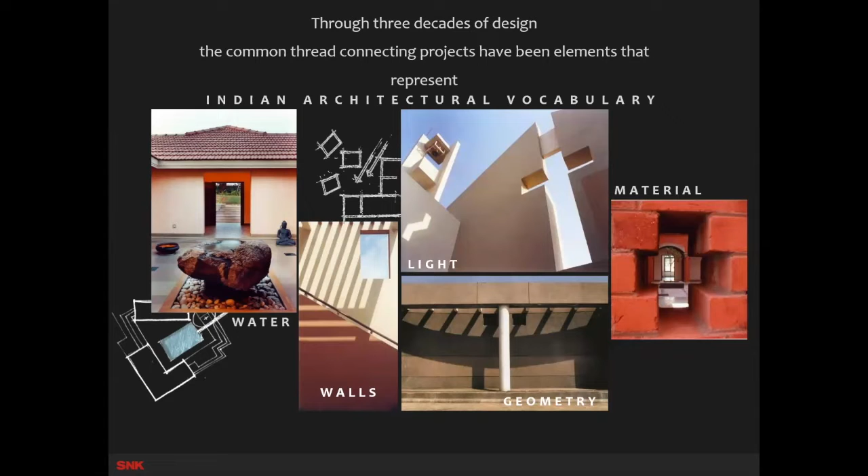So our vocabulary has been, of course, the Indian ethos of water, walls, light, geometry, materials. And that's what's influenced our contemporary work. I'm working all over the country, from the Himalayas to deep down south, from east to west through the tribal areas of Jharkhand and Madhya Pradesh.

And that's what's been so exciting. And a sense of contribution, because we believe India has so much of economic differences that as an architect, we have a responsibility to ensure some sort of equitable and just way of doing things to ensure a fair and equal future for all Indians in different parts.

Okay, now we come to some collaborations. The reason I've shown this is we of course do most of our work on our own, but I do believe that we can collaborate with people worldwide and that we learn. I've put this slide in particularly because I believe the Louis Kahn project of the IIM, I like to think that I could hear his voice and that there's some sort of collaboration that we're doing because of course so many years have passed and so many changes also have to be there. We have to build for the future as well and make sure we preserve what's gone before. So I always think of it as a collaboration, which gives me great satisfaction.

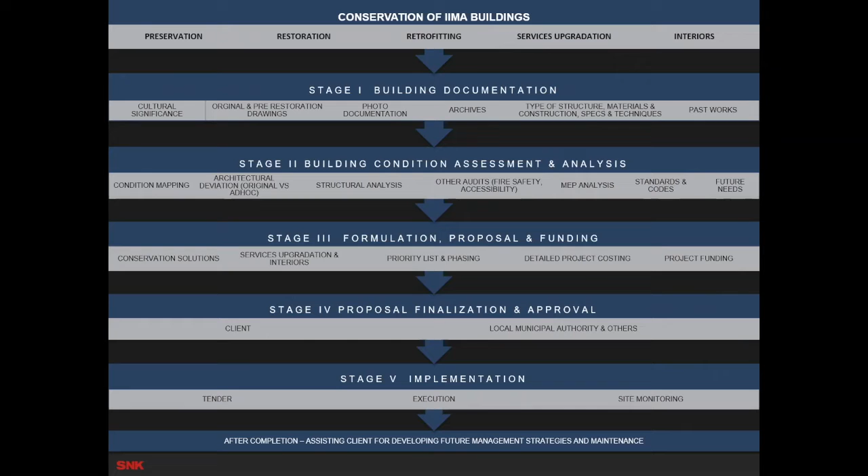We always work on a plan like this, where we have the conservation, and we have different stages of work: from the building documentation with all its subheadings, then the building condition assessment and analysis, then the formulation, proposal, funding, and then the finalization of the proposal and the approval from the client and the implementation. So all this becomes a very important part of a restoration project as against a new project.

So the condition we studied had a lot of issues. I'm not going to go into every single issue in great detail, but there are many types of arches which Khan included in his work. He had flat arches, semicircular arches, all types of arches, and a particular type of working at that time. The brick had a lot of efflorescence. It was not the highest quality brick, and there must have been a lot of salt in the clay that was used at that time.

Now, these were some important sketches that Khan had done. And when he began to work, he was very worried about how the brickwork would be done and whether people would be able to translate his thoughts and ideas.

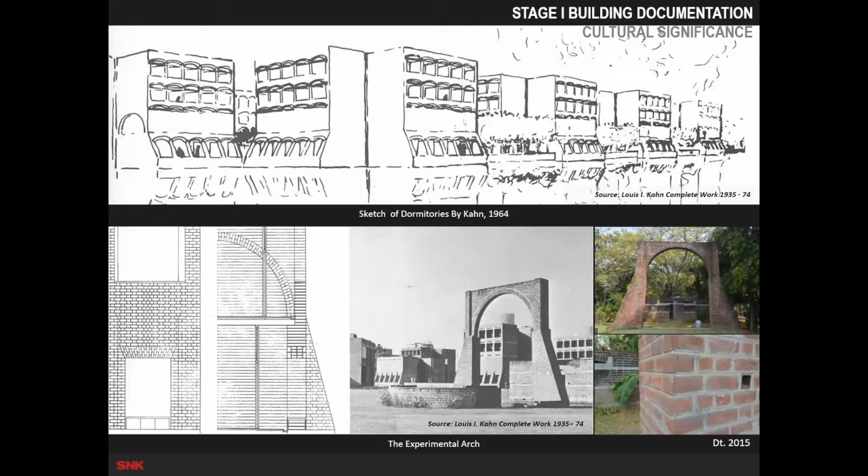So he actually insisted on what he called the experimental arch, which is very sacred because he came to India, worked closely with the people here, and this still stands on the campus, the experimental arch. And this led on to many, many thoughts and ideas on how the construction would then continue to take place.

So I went to UPenn. I did a lot of research there and found some wonderful photographs and wonderful drawings that Khan had done. It was so beautifully preserved, each and every drawing, wearing gloves and in boxes. And I think we have so much to learn from the way that archival material is protected and saved.

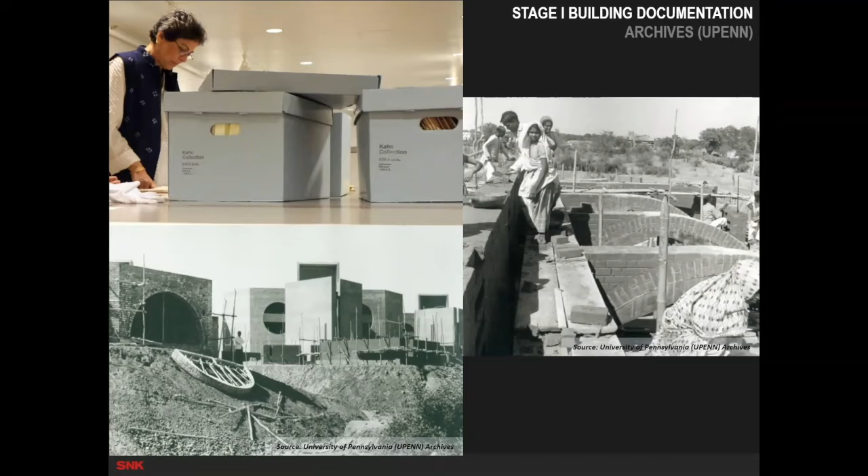So you can see women working. This was the early 60s on the campus. And these were some images which showed during the construction, which are quite rare, which we were able to get.

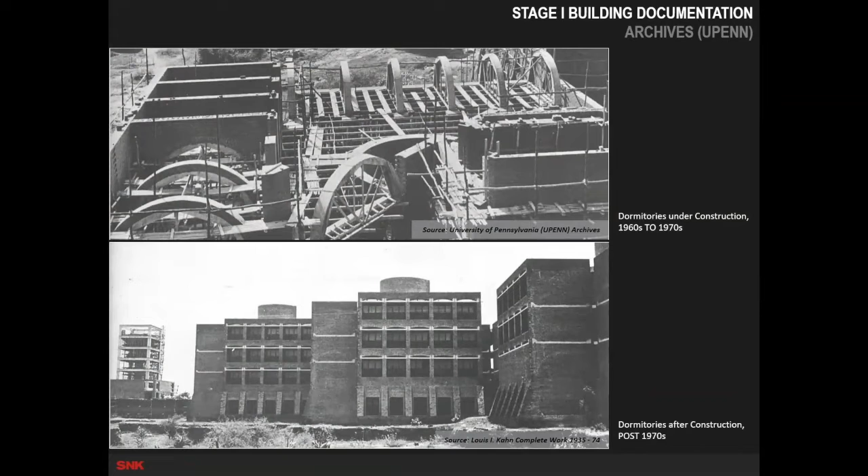So the dormitories were built first from the 60s to the 70s, and then 3 dormitories were built later. And then they began to build all the central buildings. So you can see a photograph here which actually shows the dormitories at the back, and then you can see the foundations for the faculty building on the left, the school classroom building on the right, and the library, which came afterwards, and the scrubland in the middle. So it was a very different world, and this was the world where Khan came and built and did all his work at that time.

Sharad Shah was the structural engineer. We managed to find a few drawings thanks to the IIM, which had kept some of the drawings, and that helped our structural engineers as well. And while we were doing our research, I went into one of the offices and found this wall planner lying there, and found that it was actually kept by the people in 1974.

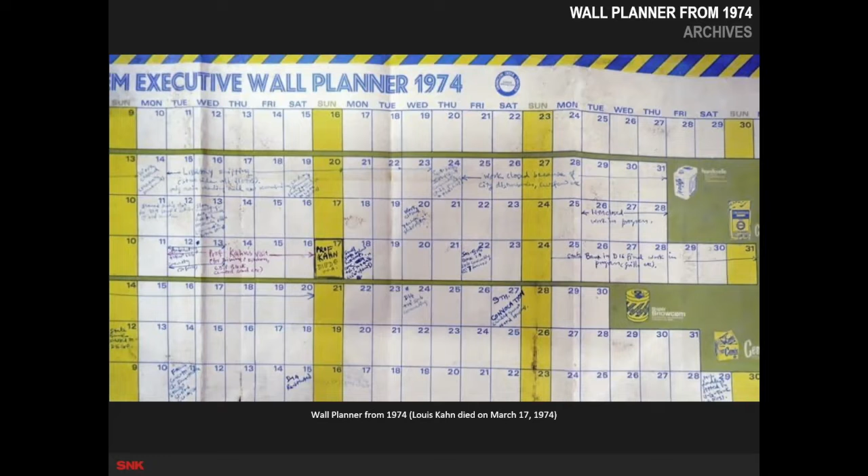And if you look carefully, you will see on the 17th that Khan died. So what actually happened was Louis Kahn had come to Ahmedabad for work and then went back to New York, and actually died on his way back from India, in New York. And I thought it was interesting how they just wrote it on a wall planner, that he had gone.

So as far as we were concerned, we won the competition in 2014. And then we began with actually a lot of analysis of the entire campus and preparation of the master plan. So we began the analysis of the dormitories, library block, and the other buildings. And only one dormitory building was taken up, which was D15. We chose it because it was in the worst condition.

And then the IIMA actually has to build student housing, which they're doing currently in the new campus, because they cannot give up these dormitories for serious restoration work until they are empty. And that can only happen when the new buildings come up. So there's a lot of toing and froing that will happen. So subsequently, we then took up the library block, and now we are doing the faculty block.

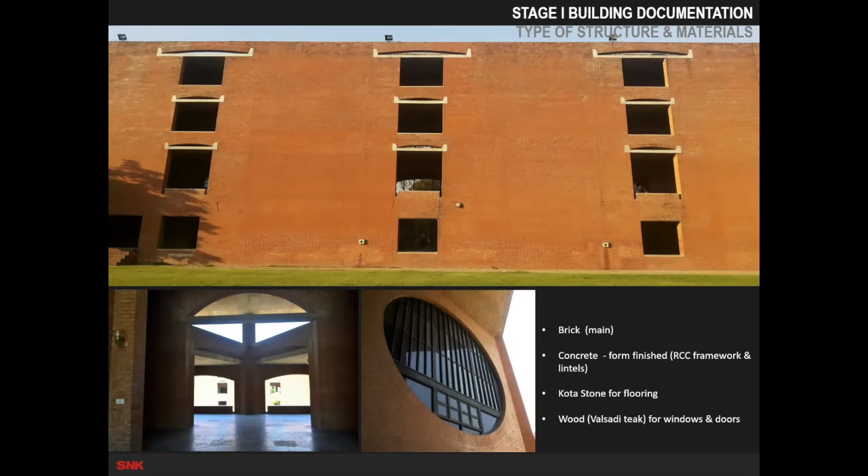So you can see here documentation. The 4 major things, the materials were the brick, concrete, the Kota stone, and of course the wood, the Valsadi wood. These were the 4 elements that were very, very crucial.

So we actually had to go into the foundation and the substructure. We had to study it. We had to study the load bearing, reinforced brickwork, because the reinforcement of the brickwork caused a lot of the spalling, which has caused, in fact, a lot of the issues as well. And then the RCC framework and the different types of the brick arched openings, every shape and size possible.

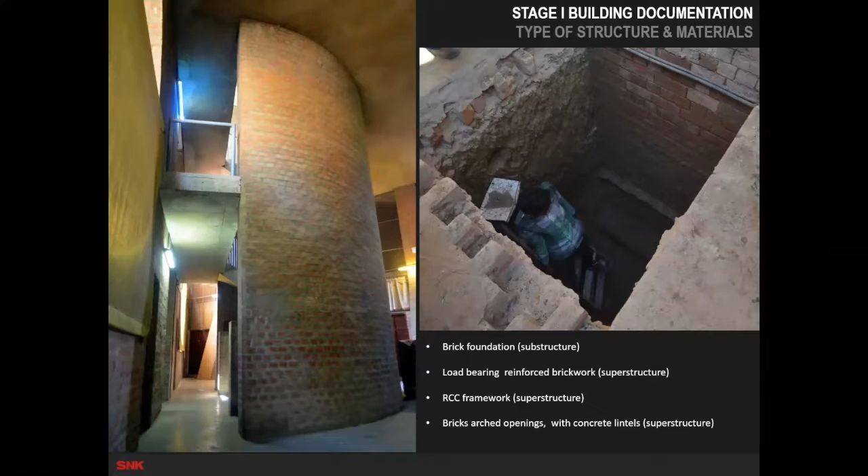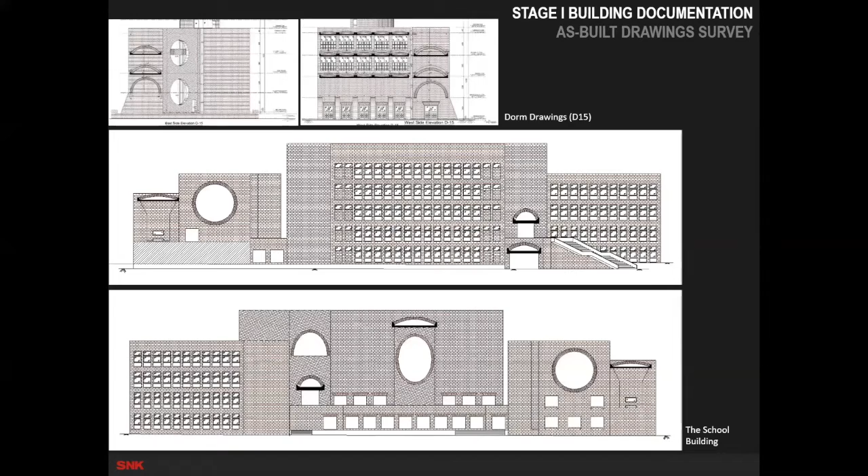So we began with the building condition analysis. There were no drawings at all. We actually had to start from scratch and prepare all the drawings that you're seeing on your screen now. There was nothing available to us. We searched very hard, we couldn't find anything, and there was nothing that could be shared either.

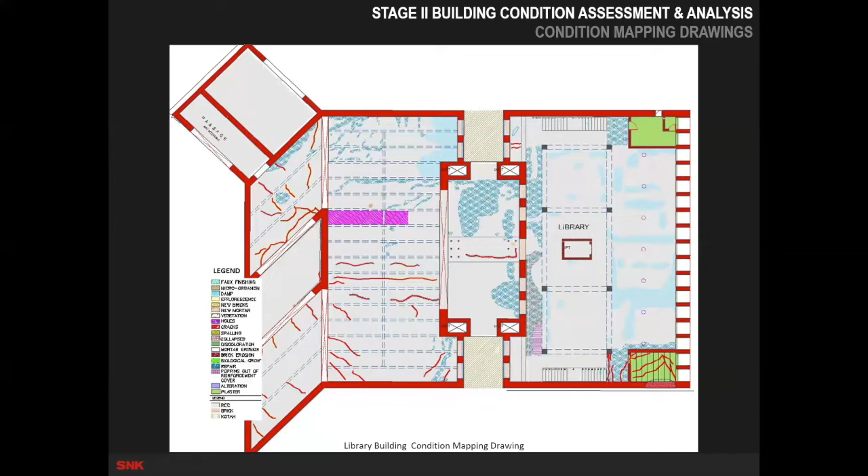And we went on, we prepared this, and then we did, of course, the condition mapping, which is the most crucial part of restoration of any building. And you can see there's so many colors here, and there's a legend. And each one of these issues on the legend has to be treated very seriously for us to understand what needs to be done for the building.

Then we come up finally, after doing all this, with the conservation plan. So to do the conservation plan, we have to study the condition assessment as well. For instance, the way the bricks were filled. Not only was the pointing not a recessed pointing, which would have been ideal because water runs off, but you can see to the right, the front, how it was the face-filled pointing. And since it was cement pointing, not lime, it was very difficult for us to remove. So we have had to accept the pointing that was originally there.

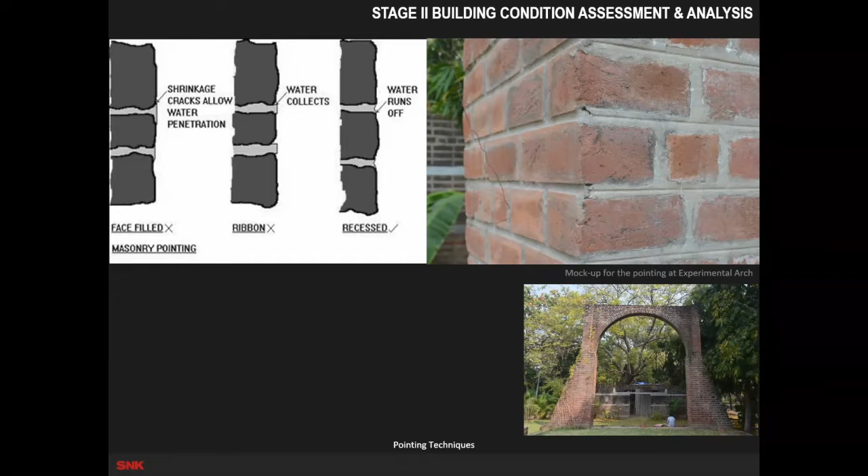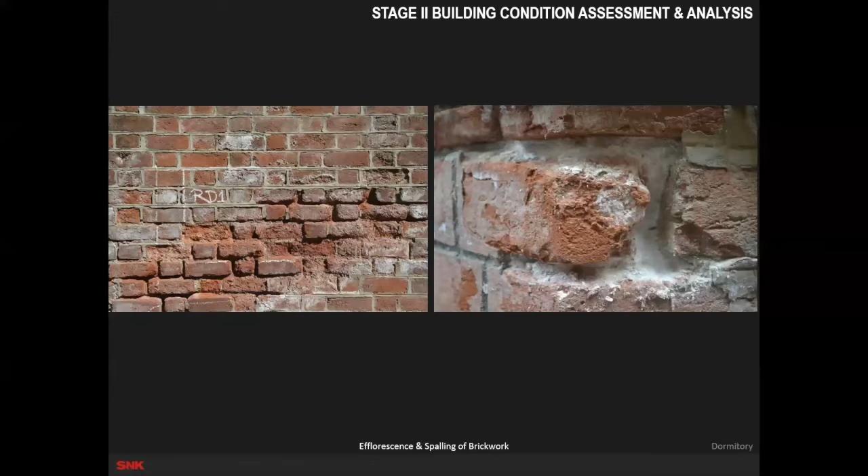So this is just one example. There were hundreds of examples like this where we had to study and understand how do we have continuity and change. The picture below is, of course, the experimental arch. And then you can see the efflorescence and the spalling. The efflorescence, of course, because of the salts that were in the clay that was used for the brick and the mortar. And the spalling over here was tremendous, also caused by the MS reinforcement in the brickwork.

Now, apart from that, there were also masonry cracks. You can see to the left, vertical masonry cracks. Now, how do we issue and how do we handle these sort of major issues?

The issue always with restoration is also that sometimes people will say, if you have to spend this much and if you have to restore this much, why don't you just break it down and build it new? It will be cheaper perhaps. And this is the challenge that all of us architects have to face, whether we're conservation architects or whether we're just regular architects, it doesn't matter.

We have to preserve what's gone before. By breaking things down and just building anew, the value is gone. So a decision has to be taken: is it worth saving, is it worth keeping, and why? And then one has to go about it seriously, work on it, and make sure that it becomes relevant for use today.

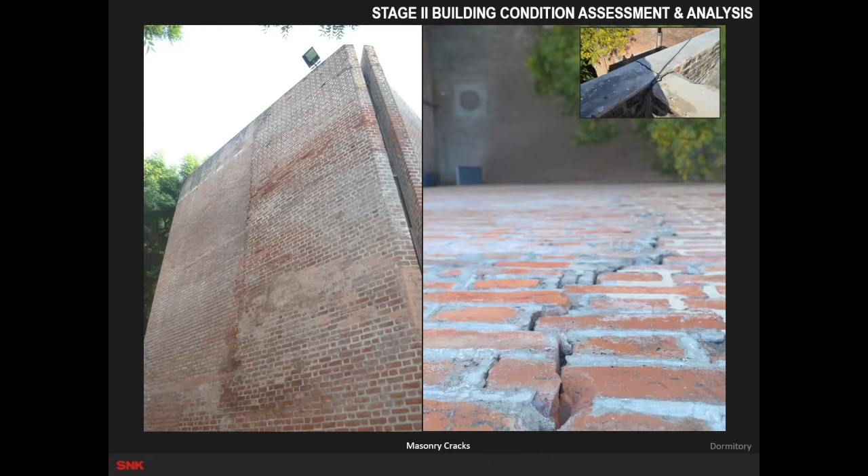We cannot make everything reverential. The Rajabai Tower could be reverential. But when you have a building that's part of a campus being used by hundreds of students, how do you create that balance? That is the challenge that is always there for people like us.

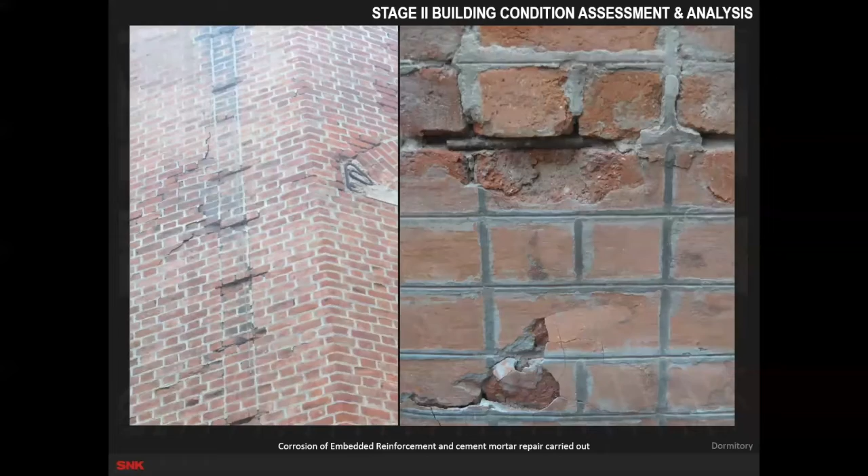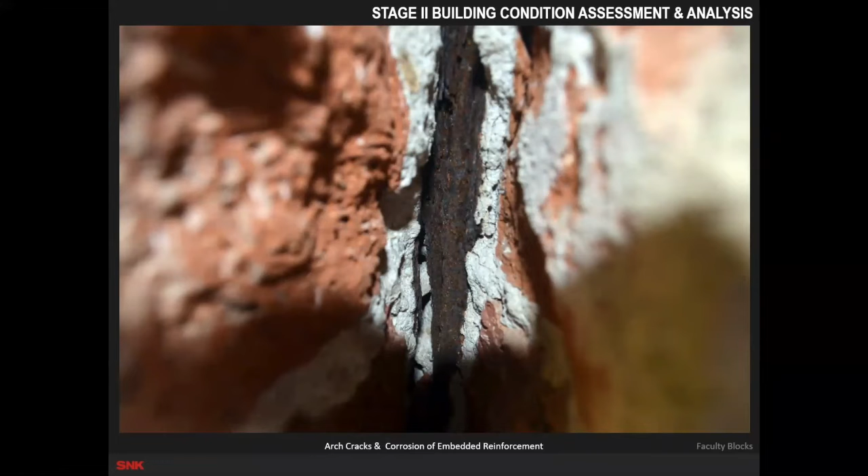So you can see over here, and if you look carefully, the picture to the right, you can actually see the MS bar popping out. That was the situation in many areas. You can see the base of these segmental arches and their condition. And then, of course, the cracks and the embedded reinforcement. If you look carefully, you can see the embedded reinforcement inside.

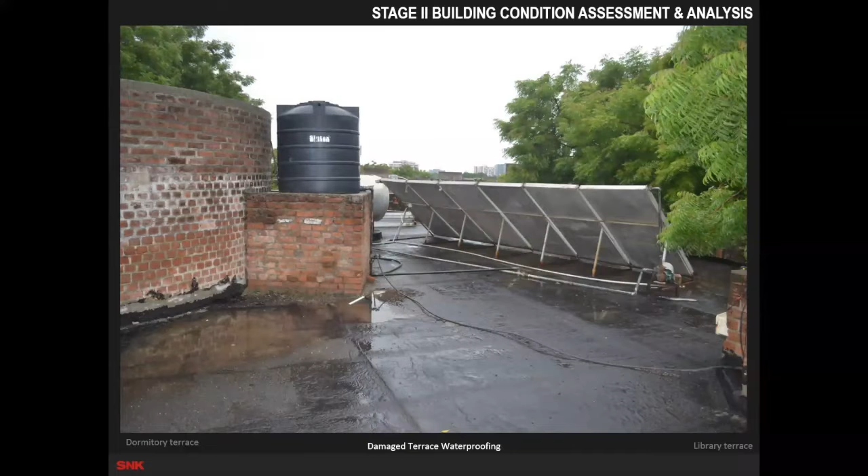Now this is some of the dormitories. Whether it was the quality of the construction, you can see the exposed steel bars in the slabs, their efflorescence. You can see the leakage from the terraces coming down. And then the waterproofing—layers and layers of waterproofing over the years took place. And then naturally, water begins to creep in between the layers also.

So to be very honest, these are not easy buildings for the IIMA to maintain. They were very complex, difficult buildings. They had certain weaknesses in the construction itself and the materials used at that time. But they were worth preserving. That's what was important—they had to be preserved.

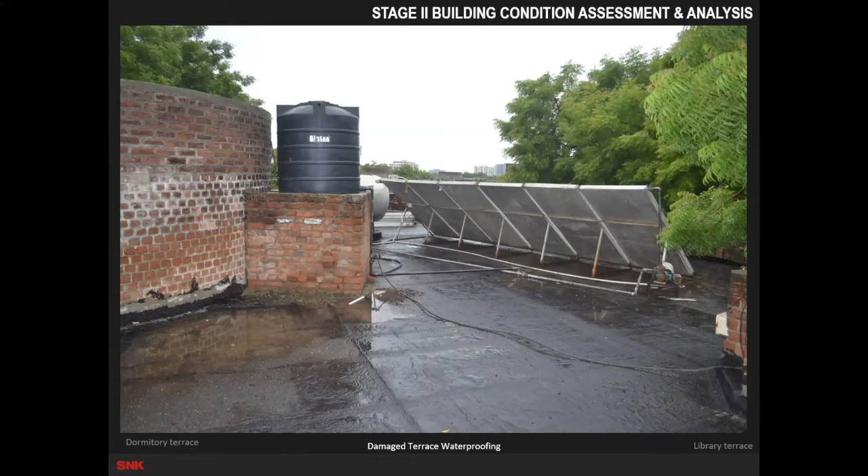They had to be restored. They had to be retrofitted and made relevant today. That was the challenge. There was no question of anything else. How do we address that?

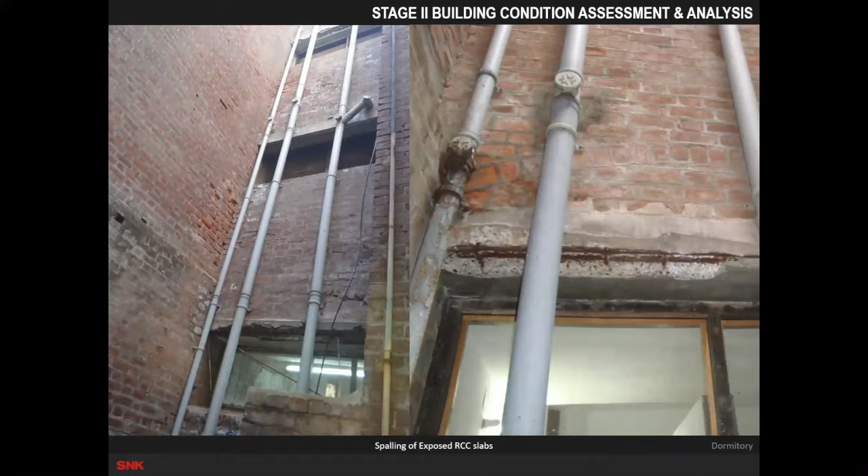So of course, this happens in many buildings. The shafts were designed way too small. Today we have shafts, we have different types of toilets, air conditioning in some areas, the electrical systems have changed, we have information technology. So naturally all that had to go.

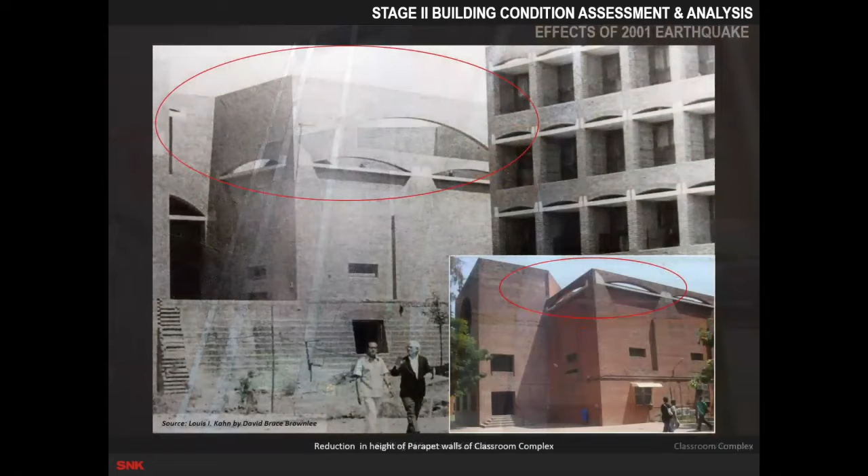And the other problem was after the earthquake—the Gujarat earthquake—you can see that they actually had to reduce the height of the parapet walls, and also in the dormitories, just to make sure that the buildings were stable.

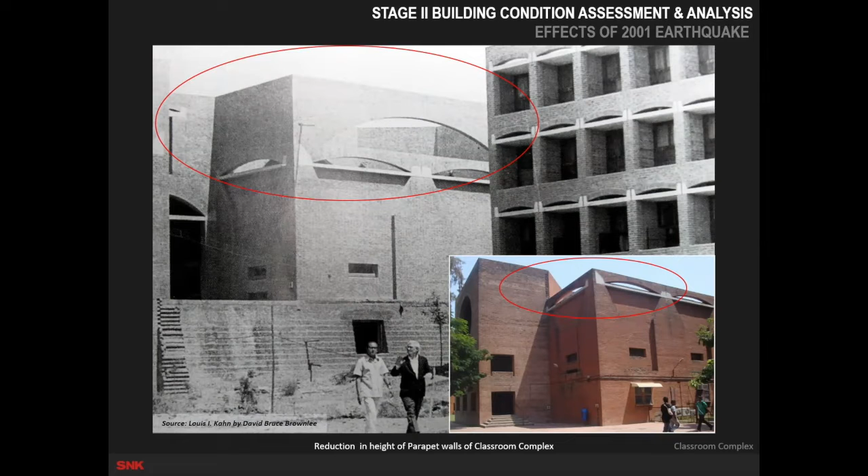So as conservation architects, as restorers, as architects, what do we do? Do we build back some of these things? How do we make it structurally stable? How do we try and bring it up to codes? How do we make it barrier free? So many different issues come up all the time.

So for instance, the staircase block of the dormitories—you can see to the right how high they were—and they were brought down after the earthquake. We again have tried to increase them, so that they have an architectural quality. But of course, we could not take them to be as high as they were originally.

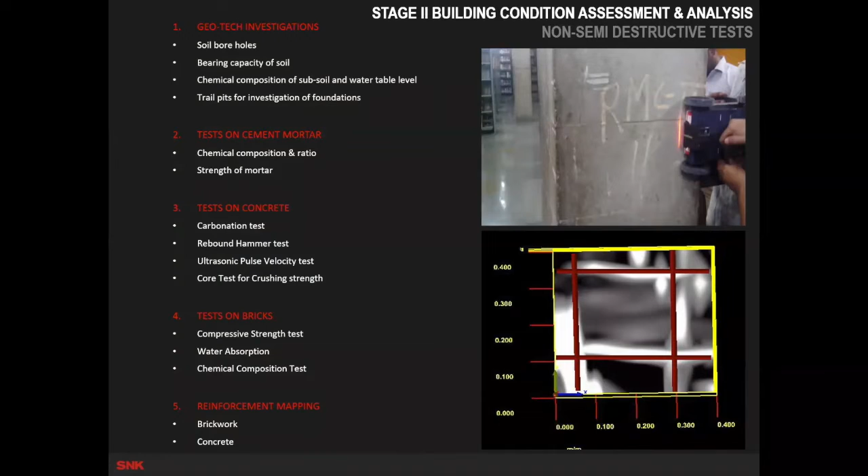So then we come to the NDT testings, the geotech investigations on the cement mortar, on the concrete, on the bricks. We had to map the reinforcement. The picture to the right shows how we had to map the reinforcement within the brick. So a lot of non-destructive testing was done, and this is some images of how it was done.

Of course, I can't go into detail—we run out of time.

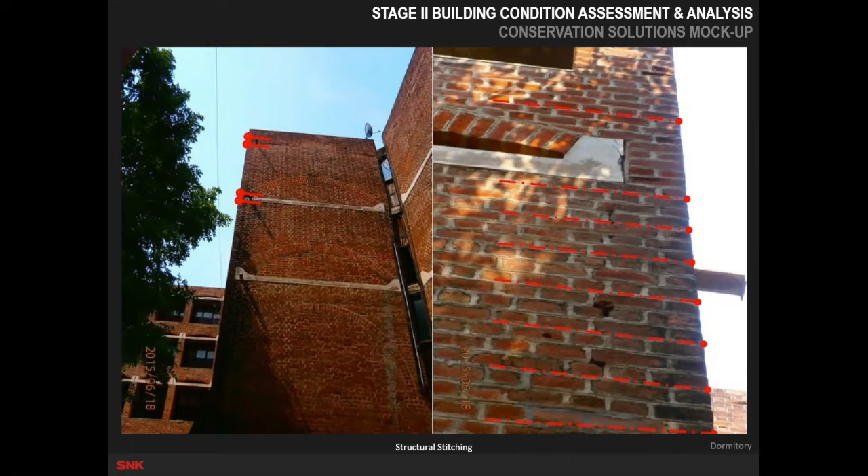And then we had to do structural stitching because there were cracks in certain areas. So what we did—we had to structurally stitch certain areas, remove some bricks where they were really not good, and replace them, and sort of staple it in a particular way. So it was quite complicated. Wherever we could repair the cracks without having to do anything major, that's what we did.

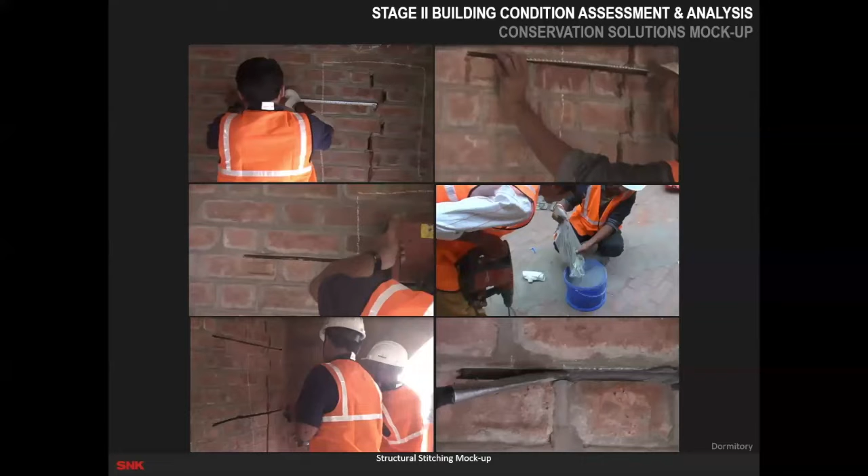And you can see over here how the structural stitching mock-up was done. It's a very careful process, the insertion of the stainless steel. Now we've put in stainless steel, and how we have to insert it, how carefully it has to be done, in particular areas only.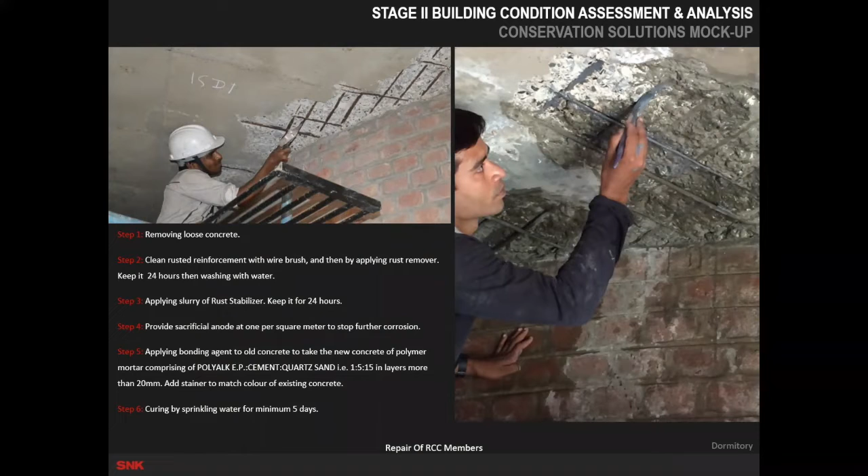And then the repair—of course the RCC, this is obvious, I don't have to go into that—how you have to remove the loose concrete and then the rust stabilizers and various other things that needed to be done. And then, of course, cleaning of the surface. Finally, we decided we were not going to use any chemicals or anything, and we've done basic surface cleaning.

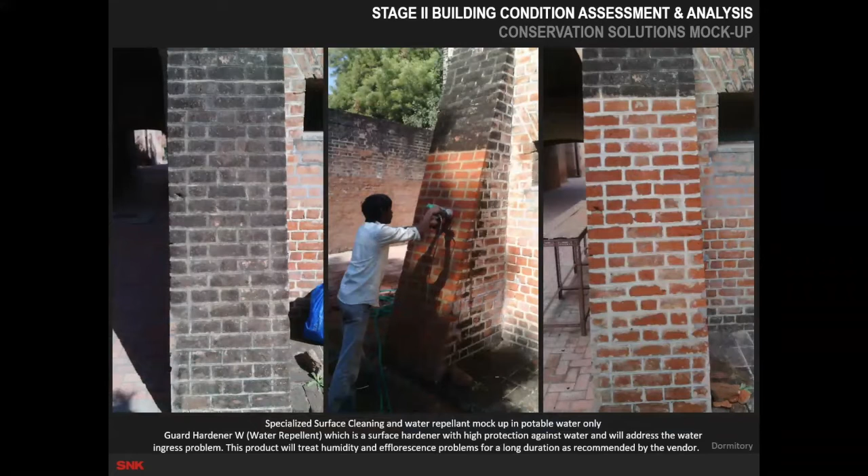And we did water repellent. We did the mock-up, and you can see we were quite satisfied that this is good enough for what we intended the restored buildings to look like.

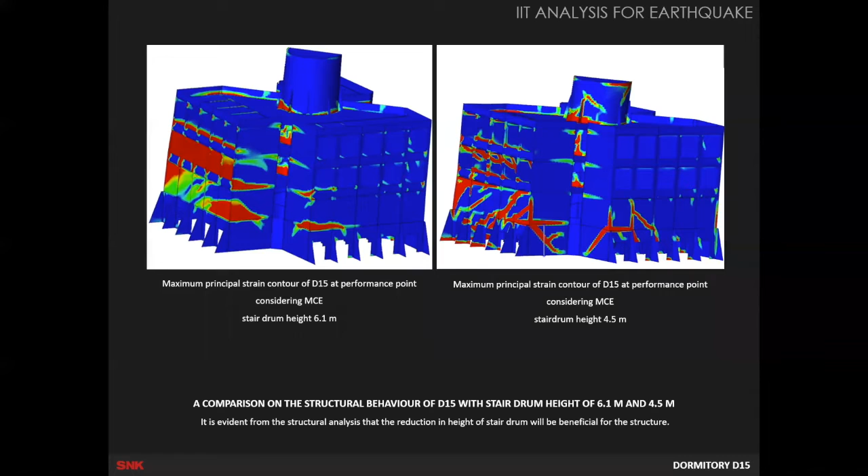Apart from our own structural consultant, Mrs. Gadiali, we also went to the Indian Institute of Technology in Madras, where Dr. Arun Menon helped us with the seismic considerations and analysis for the earthquake. We found that the structural behavior of the dorms, because of this increased drum height, had caused certain issues. You can see with red, and that had to be addressed.

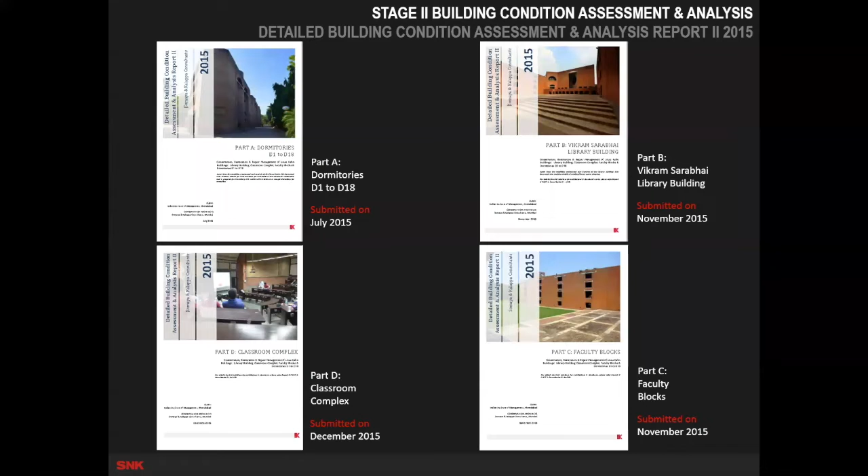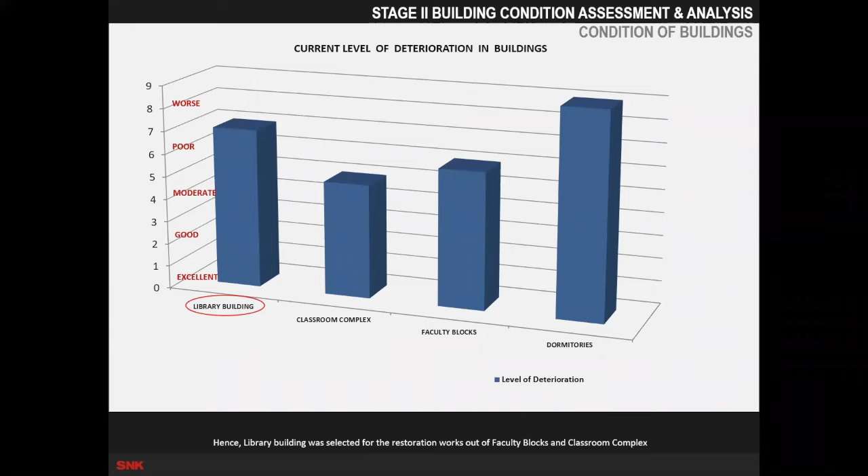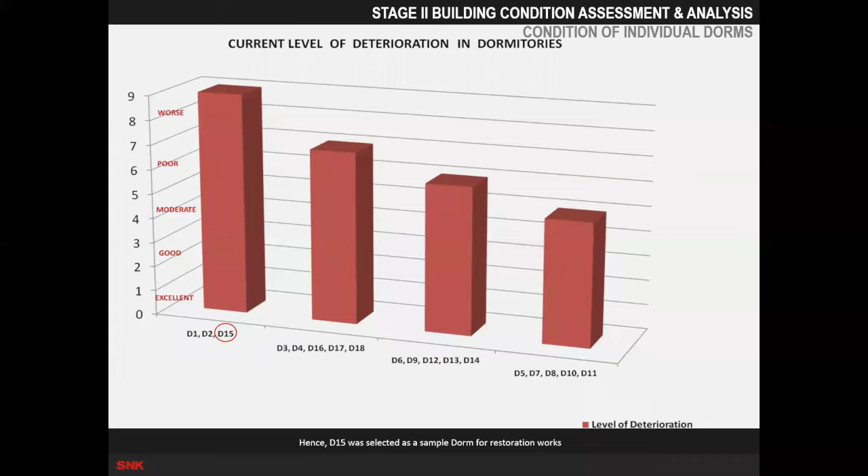Then, of course, we prepared a very detailed building condition assessment of all the aspects of the entire competition area and the various buildings that form it. We found that the library building needed certain work, and certain dormitories, like D15, also needed work. So we decided to take D15 up as a trial dormitory, since it covered almost all the different aspects of deterioration that the other dorms had, so the IIM could take up the others at the appropriate time.

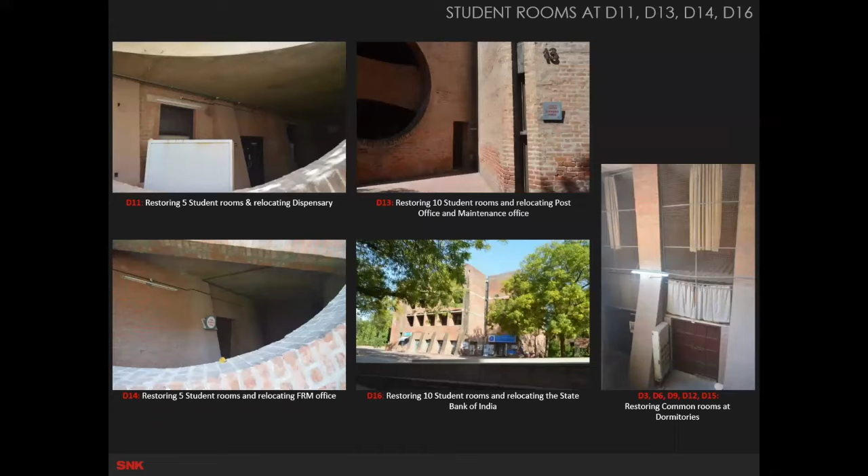So we took up, you can see D11, there was a dispensary; D16 had a State Bank of India, so offices, post offices, maintenance offices. We did an analysis of all the dorms and how we had to address each one of them.

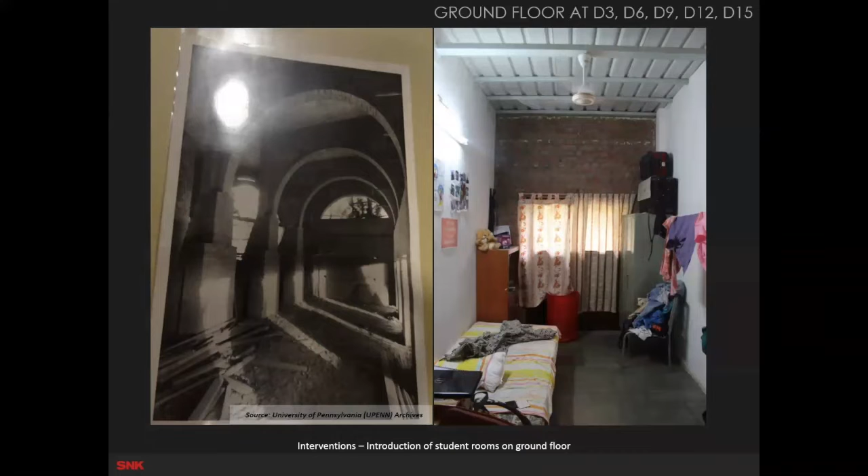This is how, to the left, Kahn had probably envisaged that this would be the student rooms, and how with a false ceiling some of these areas had been converted into rooms for the students. So essentially, on two sides of the triangle the rooms are there, and then you have the big triangle in the center with the staircase and the attached block, which has the pantries, toilets, and any other services that were required.

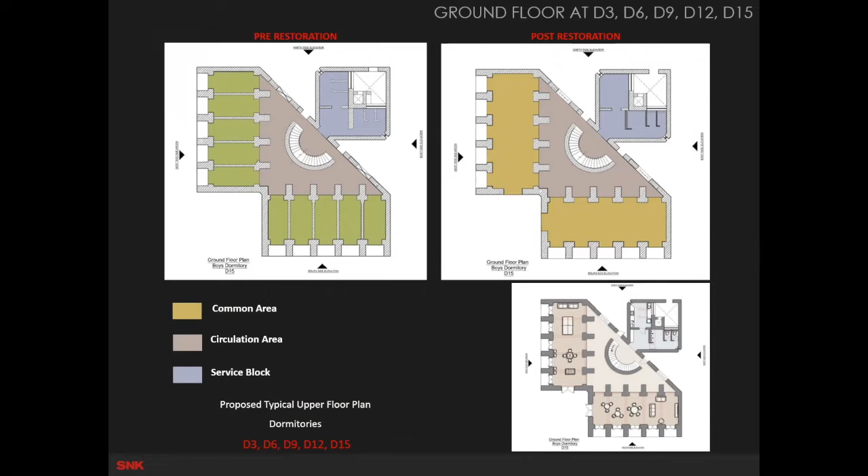And post-restoration for D15, we kept it very, very clear what we wanted to do. We did not disturb the planning at all. We just upgraded all the facilities and stabilized it.

So you can see over here the three red rings which were brought down, and the difference in the height of the staircase block, which caused many earthquake-related issues. And then we began the retrofitting proposal of how we could retrofit the building.

And we brought back what Kahn had envisaged to the ground floor. So if you see on the bottom right, the plan, we have opened up what had become rooms back into the lounges and the common rooms for the students.

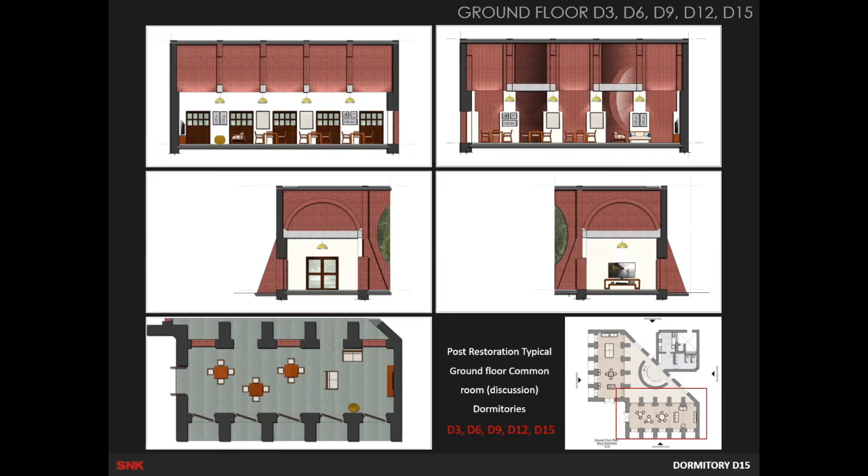But when we did that, we also had to strengthen certain things which had deteriorated over the years. So we had to introduce certain beams, but we did it in a particular way that was strong, yet did not disturb the internal feeling and the double height feeling that Kahn had created in these rooms.

So this is what we had proposed - these are our drawings, and this was a typical student room, where we studied a lot of how Kahn would have liked it. He didn't like too much color, but India is a different place - you know, we can't just have grays.

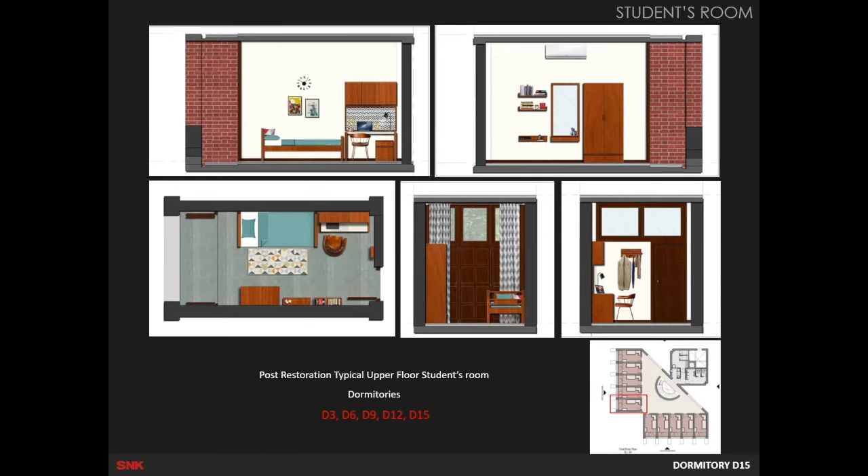So we had to understand how do we create this balance. We studied a lot of his old projects - how he used color, how he used light in his different Kahn buildings all over the world.

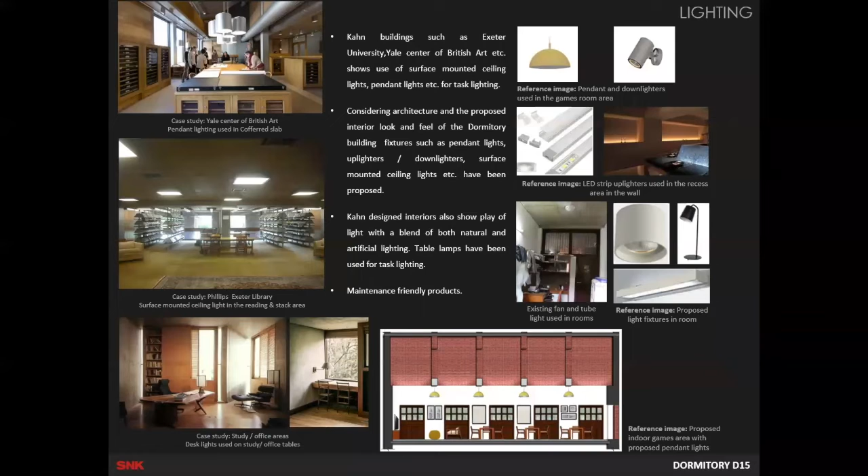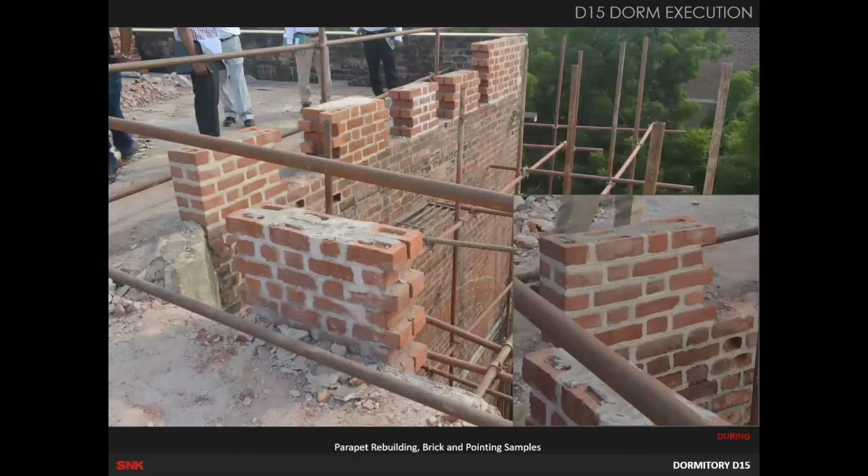This is, of course, the building at that time. Over here, we rebuilt the parapet because there were weaknesses there. We did a lot of sample pointing, and finally went with the one on the right.

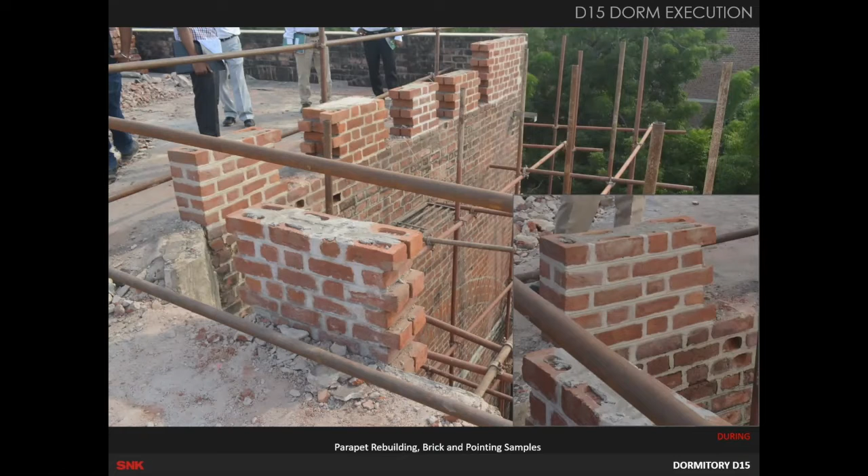We tried 4 or 5 different types of brick because the brick that Kahn used wasn't the typical bright red terracotta color. If you know IIM, it's not the Mangalore type of brick - it's much more pinkish, lighter in color. So we had to go to 4 different quarries and establishments until we managed to get the closest match we could find.

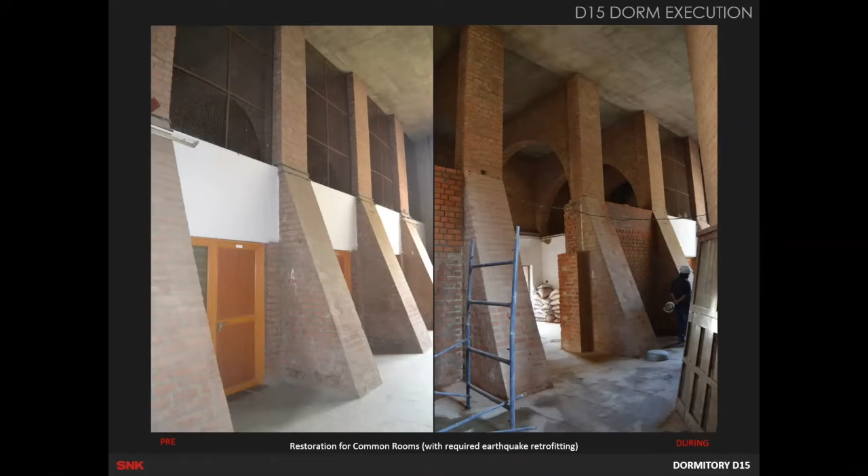Then we began repairing the doors, windows, the stitching, and the RCC work. You can see how we restored the common rooms, got rid of the false ceiling in between, and took it back to its original wonderful height.

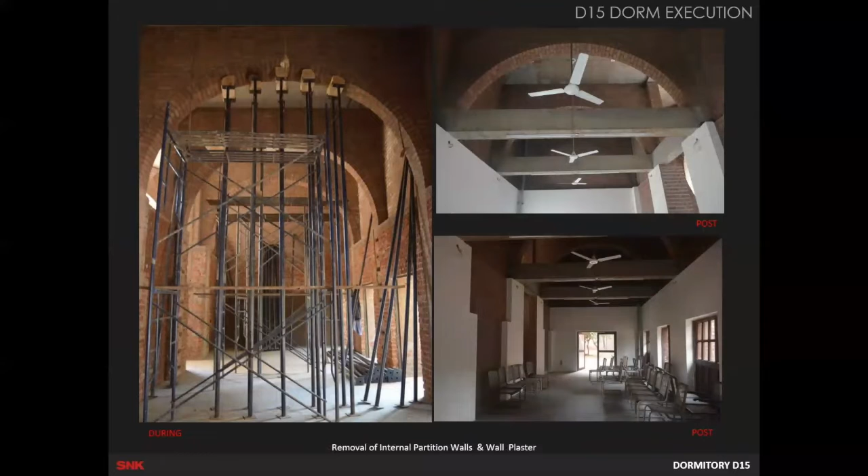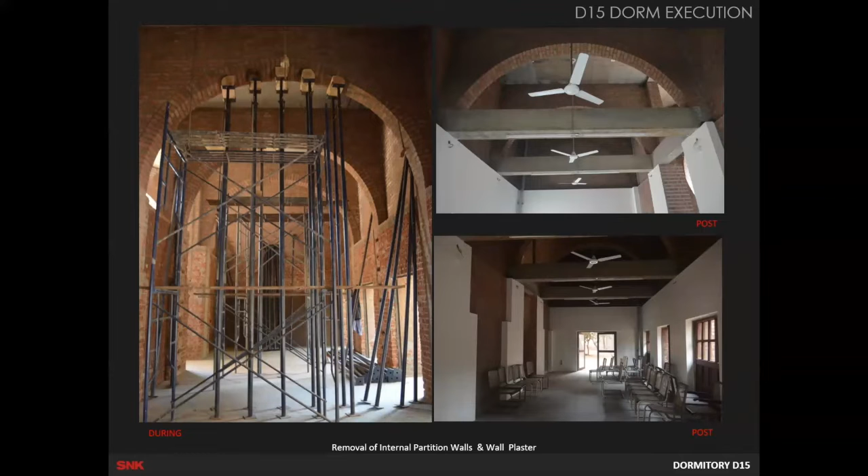You can see walls had been built in between, so what we did was puncture those walls and bring it back to the outside, because those were also original entrances into the building at that level - all these buildings enter at different levels. You can see in the picture to the right how beautiful it becomes once that double height feeling is restored, and what we've done by puncturing through.

We could not remove the white paint completely because it had gotten into the brick, and when we tried, we found the brick wasn't strong enough for the paint removal. So there were some things we had to compromise on and accept in a way.

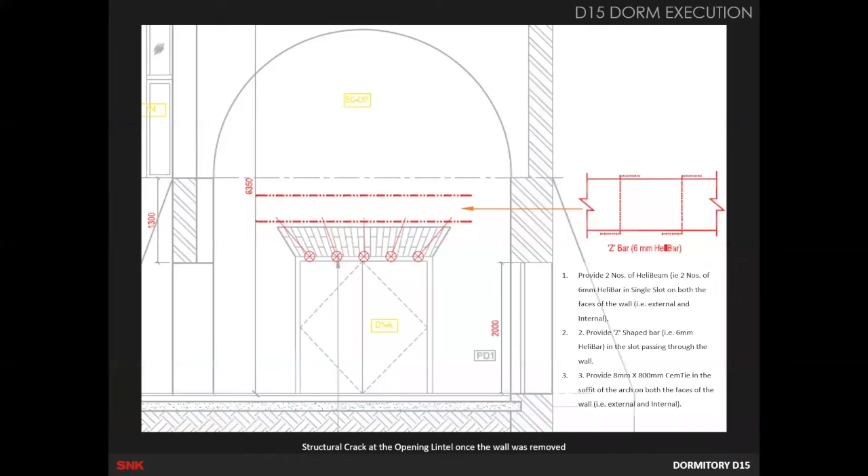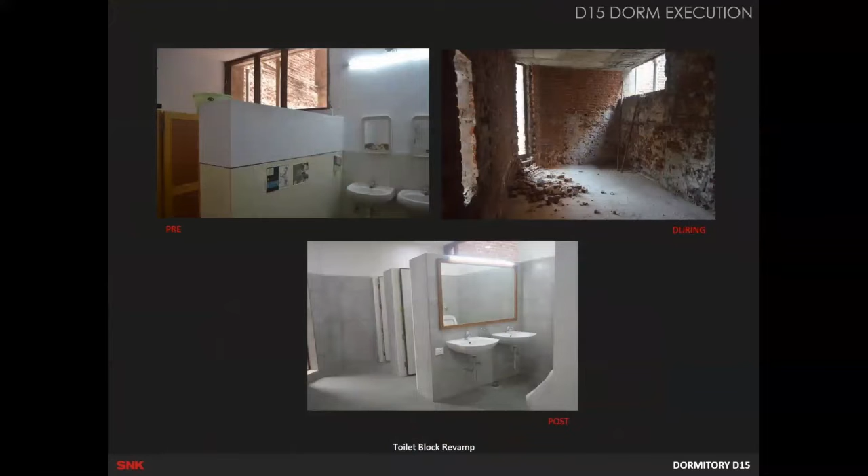Now to come to the library building, which is the main thing - we had to restore the fabric, upgrade the interiors, and have fewer stacks. Here the IIM was very supportive because they actually moved a lot of the books out to another area.

Students use the library for different reasons now. They don't necessarily come just to read or just to read books - sometimes they can even sit in their rooms and study. So why do they come? They come to interact, to collaborate, to discuss. But some come for quietude, for solitude, so we have silent rooms. We did this combination.

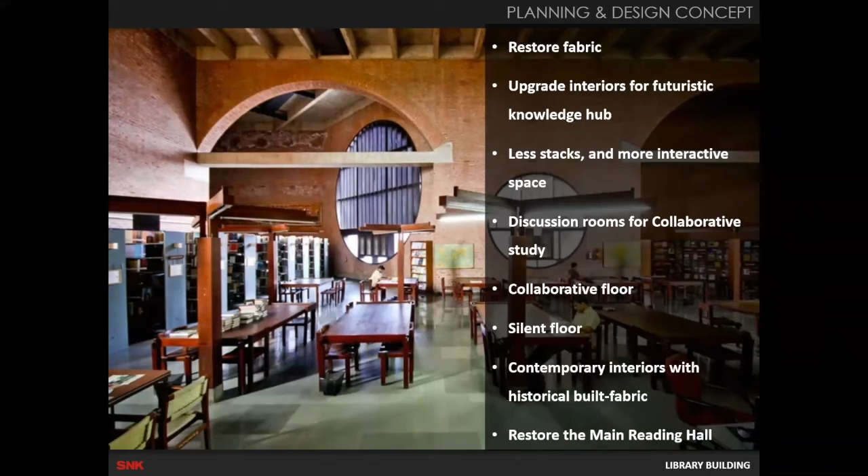And of course, the most famous, beautiful triple-story height is the main reading hall, which we restored completely. So we studied the silent zone, quiet zone, and conversation zone.

We worked very closely with the librarian, Dr. Anil Kumar, and I was very sad to hear last month that he passed away of COVID. We miss him greatly because he was a wonderful support to us, along with the director, Manoj Bhatt, and all the other people. Dr. Anil Kumar was there with his team on site every bit of the way to tell us what his dream and vision was for this library.

Now this is post-restoration - I'm showing pre and post. We got rid of a lot of the stacks. This is the first floor plan, which is the main entrance. We created an interpretation center, moved a lot of the stacks away, and created a cyber laboratory, lounges, and interactive spaces.

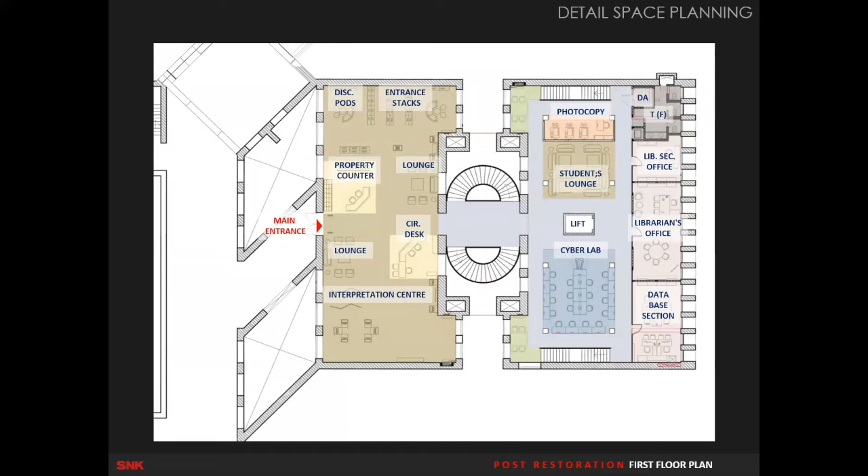The ground floor plan, at the lower level where you can enter only on the south side, used to be a publication department with stacks, offices, and administration. What we did was create coffee breakout spaces on one side, a children's section, and concentrated stacks in only certain areas at this level.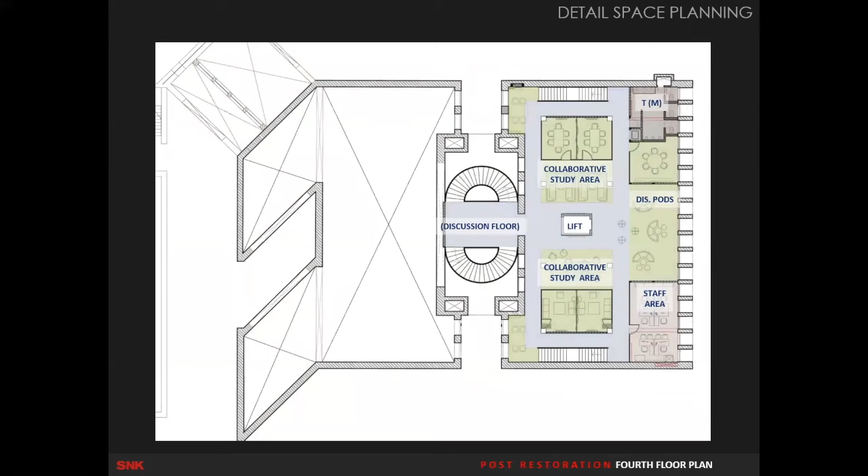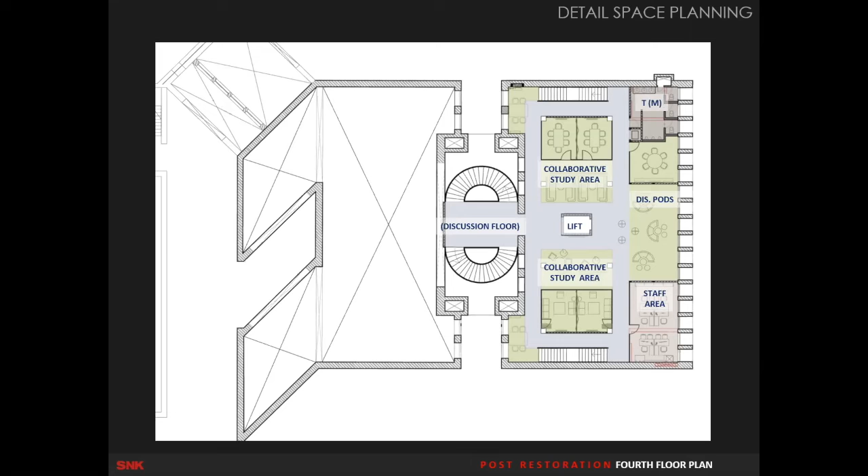But then on the upper floors, which was just stacks again, we began to change things a lot. We had carrels again, periodical sections, stacks, and here we created collaborative areas, study areas where the students would come, chat, open spaces for discussion, keeping all the time the triple level reading hall exactly as it was.

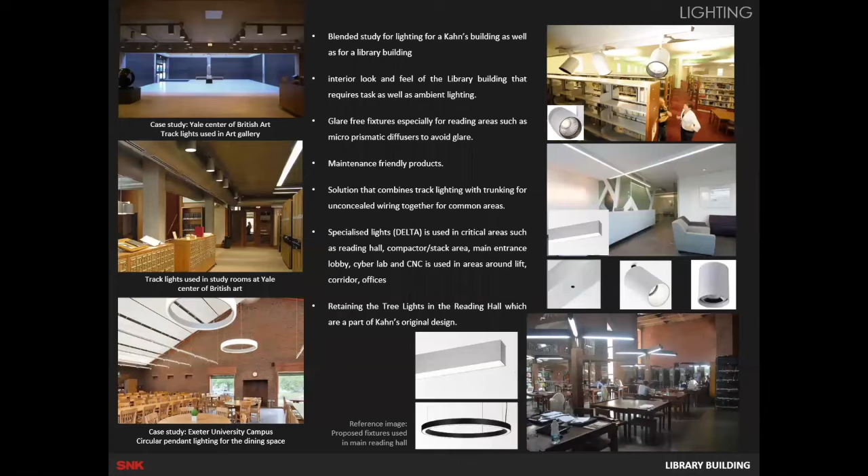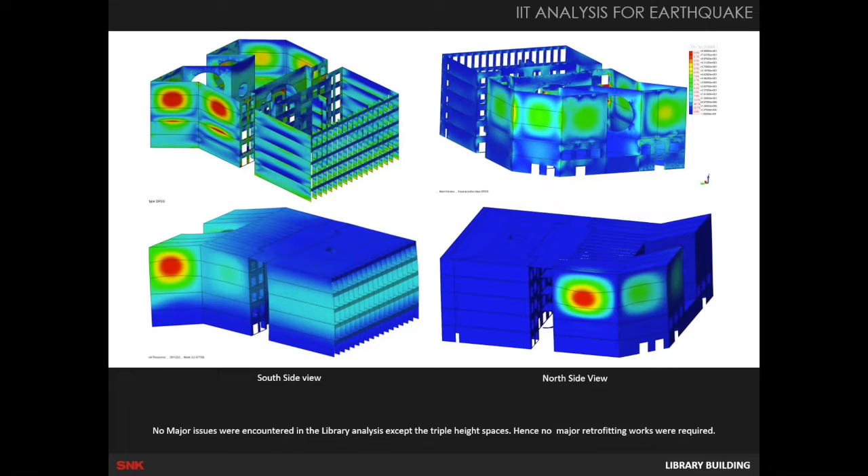How do we bring in color and youthfulness, good lighting into the building. All this becomes very important, air conditioning, lighting. Here we had less problem with Dr. Arun Menon's analysis because of the shape of the library, unlike the shape of the dormitory, the building was of course much more stable. So we had only some areas where you have the red, where we had the issues.

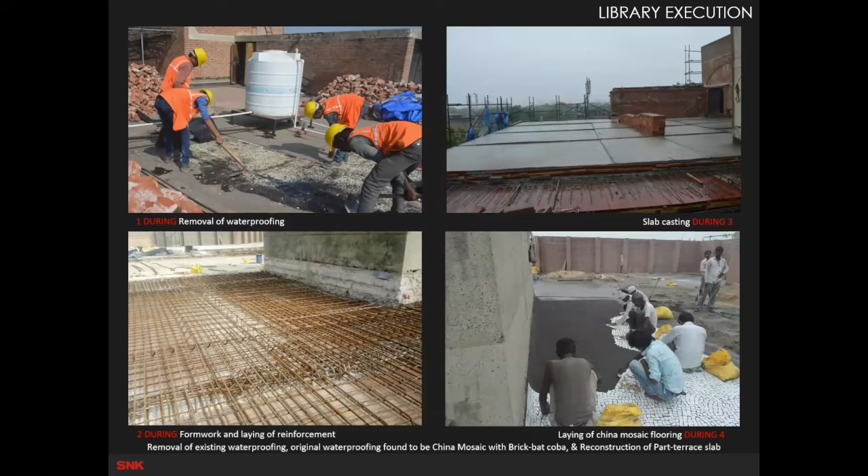Then the implementation began. We had to reconstruct the terrace slab, which had completely deteriorated. We had to create new parapets. And of course, it was a process. You can see removal of waterproofing, casting the new slab, laying the China mosaic, similar things to the new parapets shown earlier. You can see the retrofitting going on.

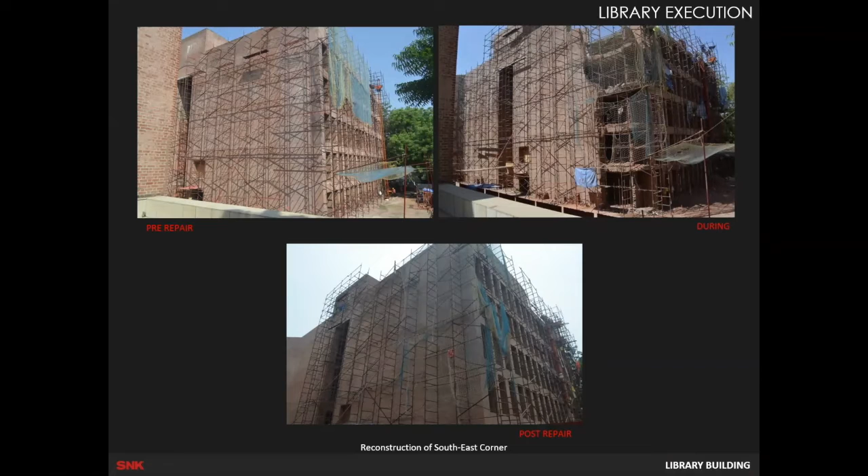Now, this was interesting because the southeast corner of the library had completely deteriorated, and we were not going to be able to do the stitching that we had done earlier for the dormitory because it was in a very bad state. So we actually had to remove the brickwork in the southeast corner and reconstruct it very, very carefully, as well as the 85 flat arches that we had.

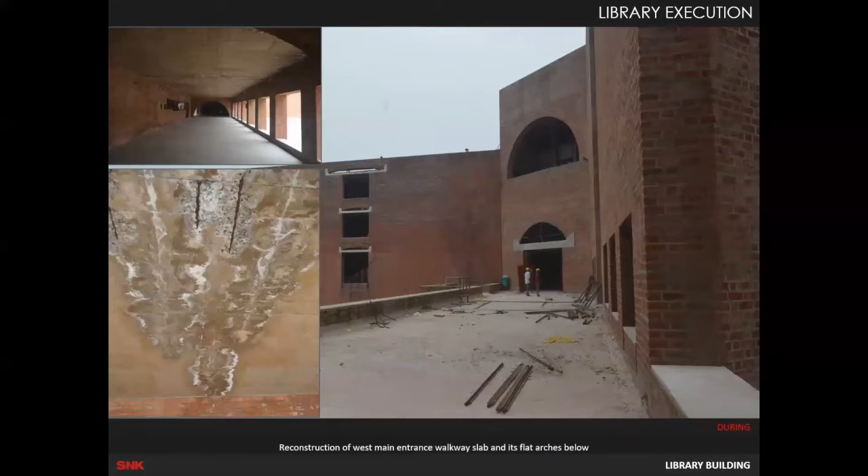Some new brick pointing was done. And of course, the slab below, you can see the condition. So that slab also was completely recast.

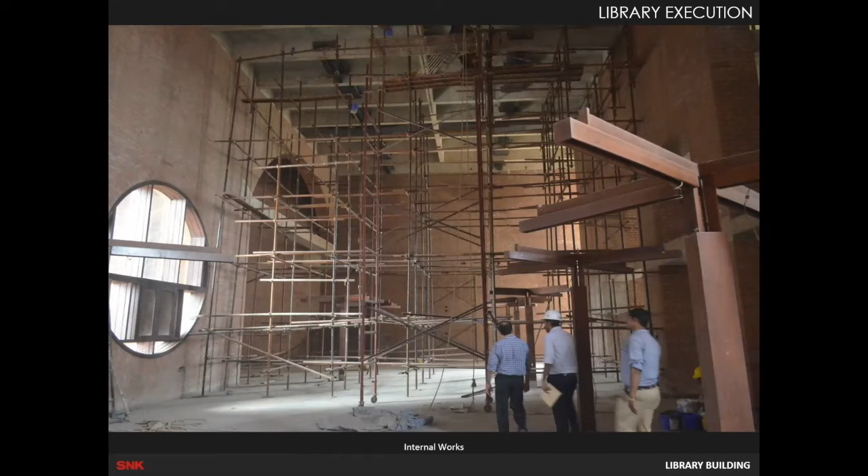And then we come to the magnificent triple height. There were issues. There was air conditioning earlier, but there was a lot of efflorescence, a lot of issues, some of which I've mentioned before. You can see some of the services, the condition of the RCC slab.

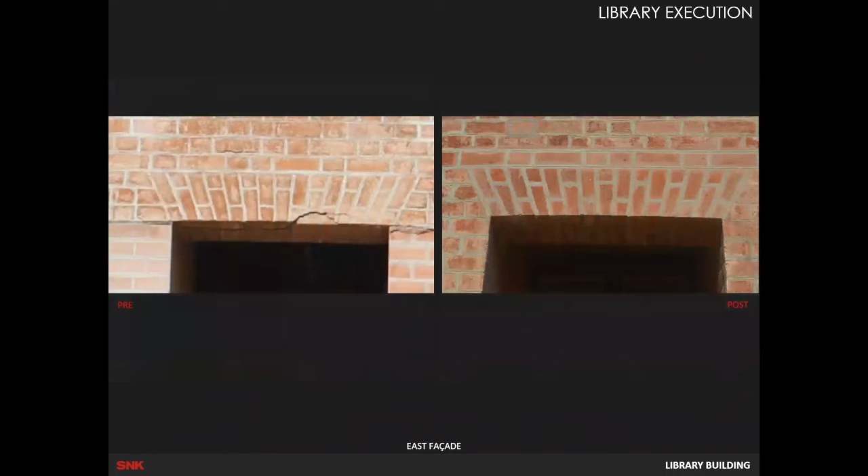These are the 85 flat arches that were completely restored by us, rebuilt. And that's the southeast corner. You can hardly make out. It was quite a challenge that we took on.

We found one enormous applique artwork and we saved it. We found out it had been done by Sarojben Lal, who turned out to be a very famous, simple, brilliant, talented woman. I have to thank Dr. Chatterjee, who was with the NID earlier and has helped us. We've sent it to Delhi now, and he has located somebody who is in the process of restoring this applique artwork. We intend to put it back in its place.

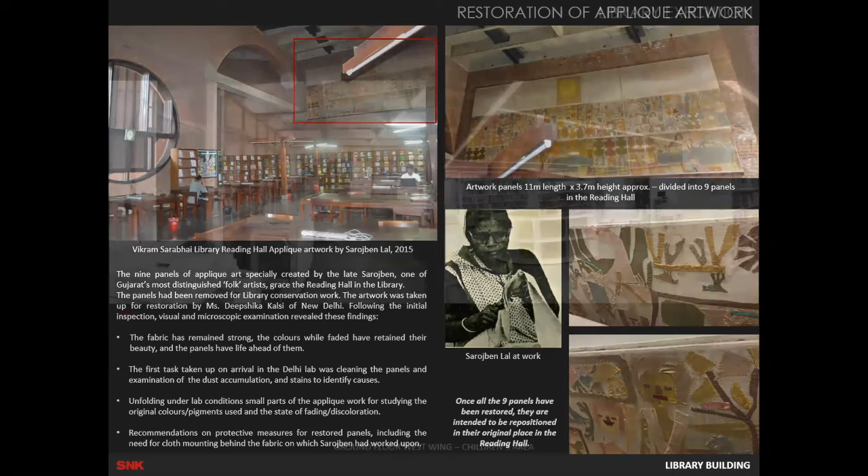And I really hope that this will be the case. So to end, we have now begun on the faculty blocks. Work has actually begun on site, and that I will keep for another lecture, perhaps some other time.

So what is the aim of conservation? We have to retain the cultural significance of a place. We have to document the condition before we do any type of intervention, and we should try to have minimal intervention. We have to carry out research and mock-ups, very crucial before we implement them, and as far as possible, use like-to-like materials.

And then we have prepared for the IIM a maintenance manual, because as architects, we come and we go. We cannot maintain the building, but unless these buildings are maintained, and when issues have to be undertaken, they are taken in a responsible way. So in the maintenance manual, we have also provided detailed guidelines for when interventions happen, how they have to happen. Because otherwise interventions can cause more difficulties and more problems to an old building than even existed before. So it is complicated.

For me, I say, why conserve? I believe that cultural heritage offers a city... I come from the city of Mumbai, and I know how complex it is, but it's also an amazing city which has got a huge architectural and cultural heritage. So the heritage which we see is the legacy from the past, what we live with today, and what we also pass on to the next generation. That ensures a sense of belonging, a sense of place. I believe it brings in a certain equality, and it's a source of life, of our spirit, and our inspiration for all of us.